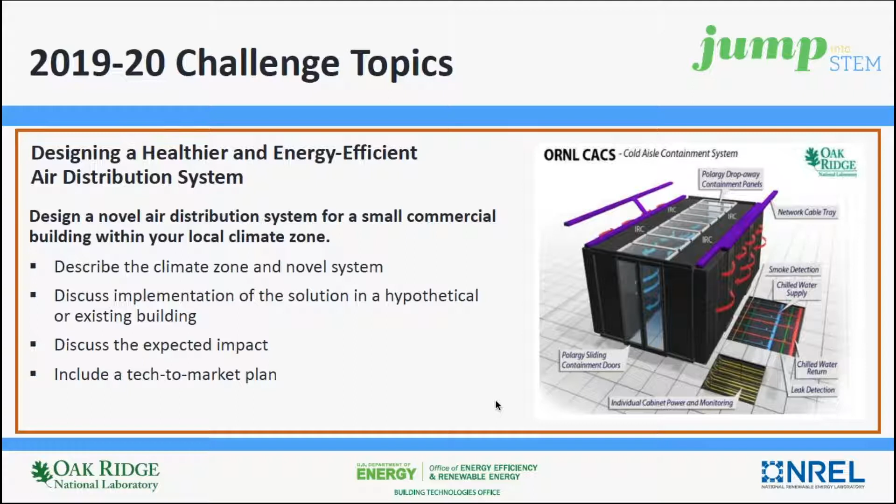The second Jump into STEM challenge topic is to design a healthier and energy-efficient air distribution system for the small commercial building setting using your local climate zone. Strong Ideas will identify a novel system for the selected climate zone and will present implementation of the solution in a hypothetical or existing building. Solutions should articulate the expected impacts from the design system and also include a tech-to-market plan.

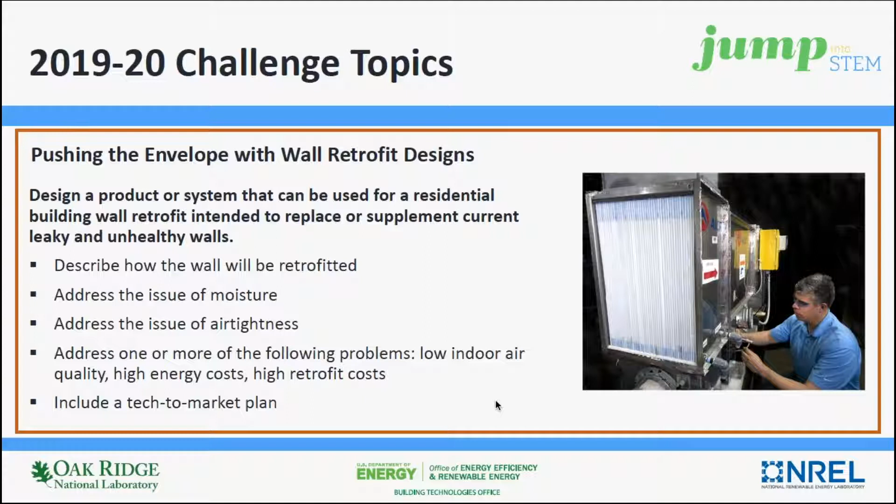Now, up next are the webinar series supporting the 2019 to 2020 Jump into STEM challenges.

Third in the series is a presentation on field experiences in implementing wall retrofit solutions, co-presented by Matt Waring from Viridiant along with Bill Riggs. Originally from Richmond, Virginia, Matt is the son of a single-family contractor and grew up around construction and on-job sites. He has worked as both a single-family and a multifamily superintendent. With 5+ years with Viridiant, Matt has worked as a technical advisor, project manager within Viridiant's multifamily team, and he is now serving as the technical director working with Viridiant's in-house field personnel and project management staff to provide rating and construction consultation services to a range of clients throughout Virginia.

Bill Riggs was born in Richmond, Virginia, and attended school at the University of Vermont in Burlington. While studying environmental sciences, Bill worked for a small independent contractor that performed energy audits and weatherization work. Upon coming back to Richmond, he worked for a single-family contractor that specialized in deep energy retrofits. Bill is currently serving as a technical advisor with Viridiant, providing verification of various green building programs as well as consultation services.

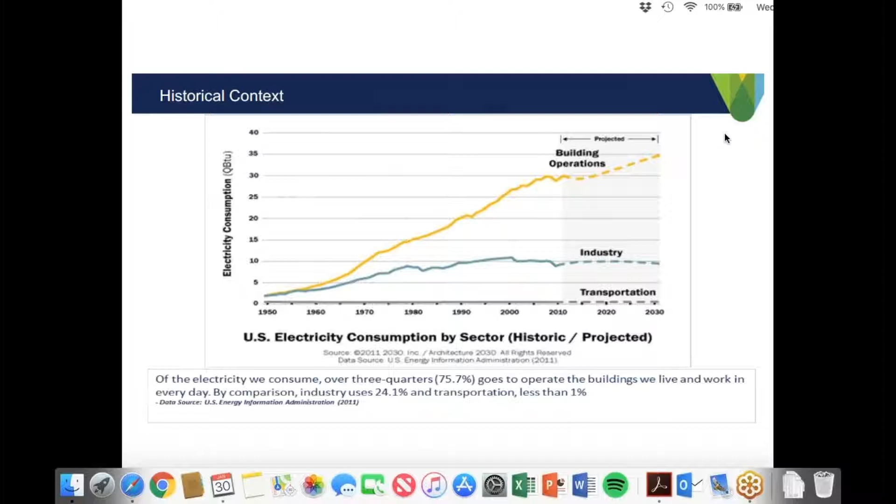You could get away with kind of murder with regard to overall buildings and what went into them. There were kit homes at that time, people building their own houses. So there are a lot of variables out there in construction type, but this really highlights the opportunity across the nation to improve upon existing buildings. Bill and I both agree that renovation is kind of the greenest form of construction, in that all of the resources are pretty much right there in front of you — it's not cultivating new resources to maintain or retrofit a single family home that's existing.

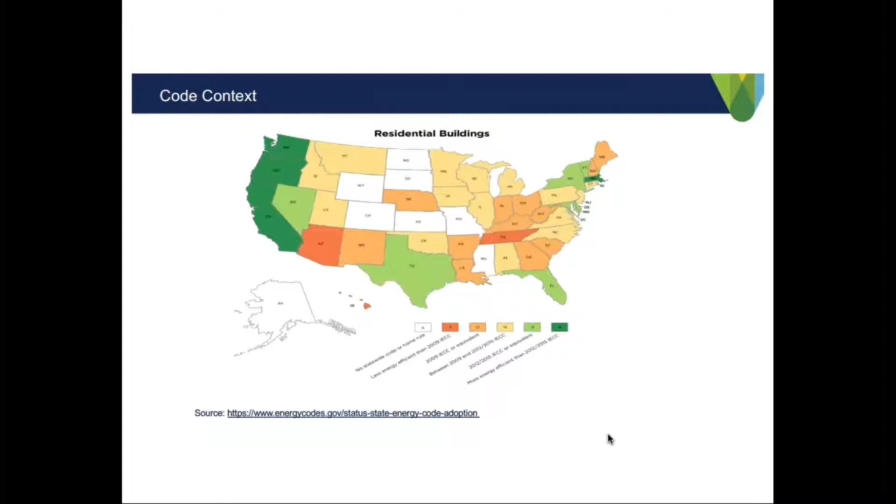For sure. Next slide, please.

One thing I'll add is that here in Virginia, if you're on the Eastern Shore, you're in one very distinct climate zone, and if you're in the tip of Virginia out west, you could almost be in climate zone 5. Really, some of these lines are a bit arbitrary. So the flexibility of being able to use a product or retrofit a home with a product across many different climate zones and building conditions is very important to us, even just within the state of Virginia. You're watching HGTV — we're not putting plastic in our walls here, but you might be doing that in Maine, putting a vapor barrier, a class 1 vapor retarder, in a wall system. These are all things that would have to be addressed in a retrofit scenario.

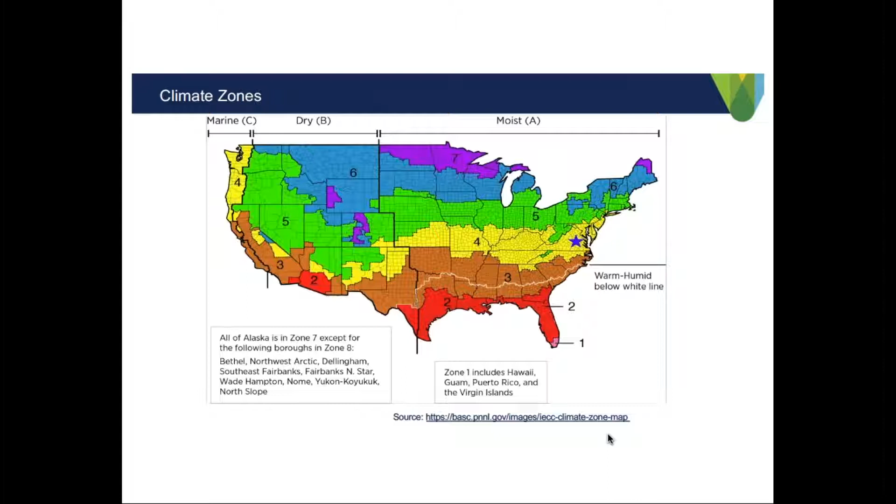That's all readily available — I think we have some links here. We'll include that and get them to Caroline so she can include those links too on the website moving forward. Next slide, please.

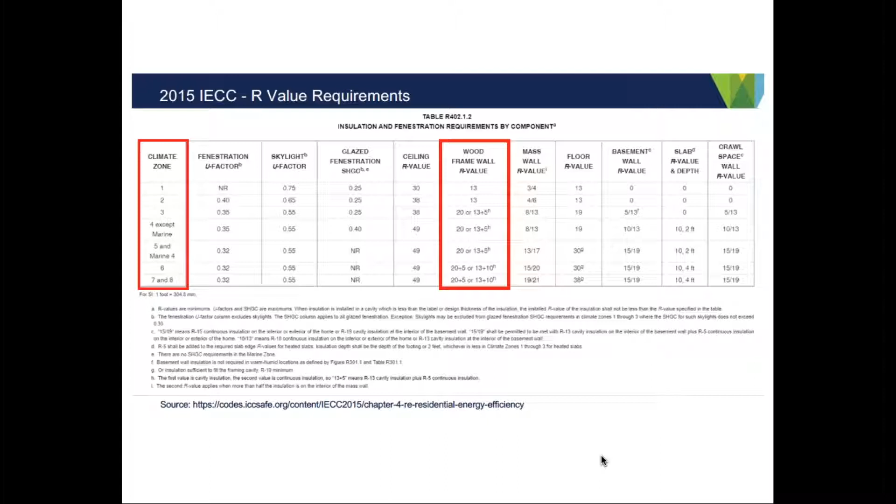Having talked about climate zone and taking that into account when you're addressing this issue, we wanted to talk to you about the history, the climate zone, and then what we do when we look at a home or a set of drawings and move this problem out of the theoretical and into the field, into the real world.

While you're thinking about the design of a wall and what it should do, essentially a good wall is an environmental separator. We build buildings to get inside from negative 60-degree temperatures like we're experiencing out west right now, so we don't have a lot to complain about. I think it's 40 here today, but it would be a lot more difficult to provide this webinar to you all if we were sitting outside. So the entire intent here is to separate our internal lived-in environment from the external environment.

A good wall should have an air control layer, a moisture control layer, and a thermal control layer. We want to prevent draftiness, wind from blowing directly into the building. We want to prevent rain and bulk water from entering the building. And then we have to have some sort of thermal control, which is the insulation portion of this equation. These are really the three main things that a wall must do in order for it to function properly.

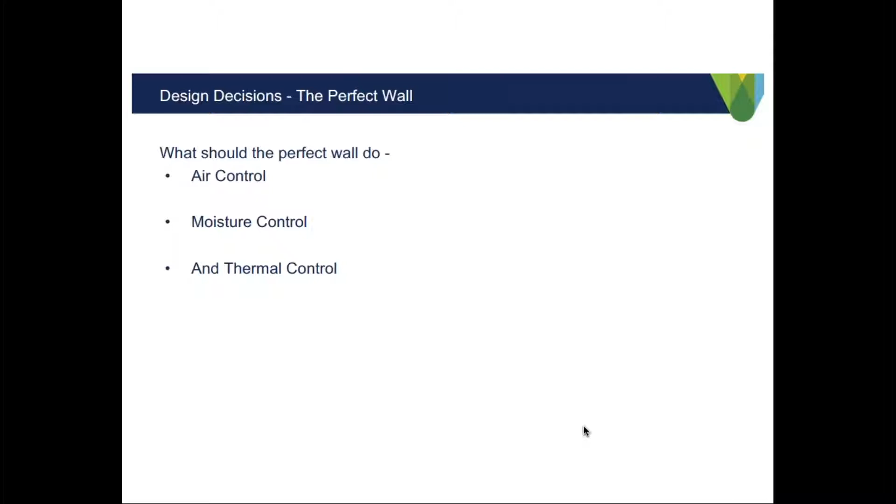Traditional energy retrofits typically focus on a crawl or a basement and then an attic, and that is because these places are accessible. That is a big reason. It's easy to get into an attic and say, hey, I could add some insulation here, whether that's to the roof deck or even to just the ceiling plane. But the same can be said about a crawl and a basement. Now, buildings' roots are really that crawl or basement, and due to stack effect, much of the air in a building does flow upward and out of the roof assembly or through that ceiling plane.

So both of these are very effective retrofit strategies. But if you look at that simple drawing of a house in terms of a beer cooler, the top and bottom of a beer cooler doesn't do anything in and of itself to keep your beer cold or your sodas cold.

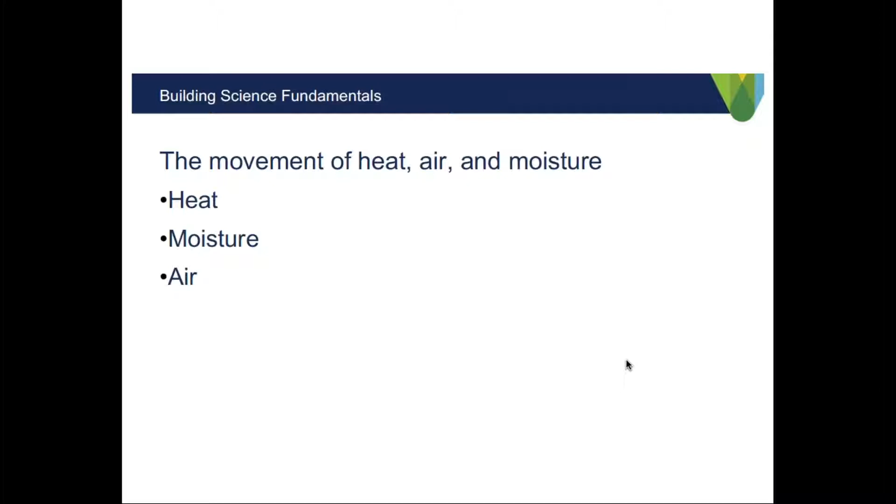The movement of heat in a building is very important, right? We want to keep the interior temperature to about 70 degrees. Caroline, if you don't mind hitting that next slide.

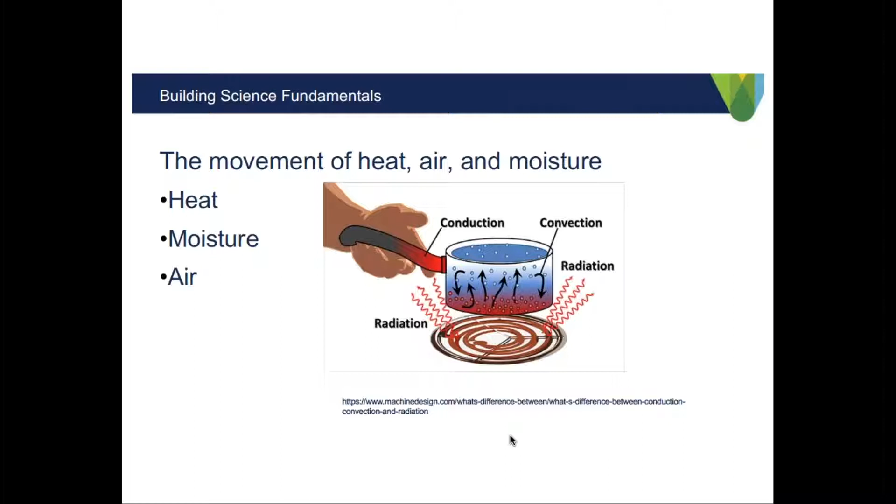The same forces for heat movement work in a building as they do in anything else. Conduction is heat moving through a solid material. Convective loops are present in all homes, and we'll talk a little bit about that in wall systems. And then radiant heat—the best example of radiant heat is just the sun warming the earth. So these are all things that are happening in the built environment that we need to control. We're either taking heat out of the interior space or putting it back into it in the winter like we're doing now. Next slide, please.

Air infiltration - air is a moisture transport system, and that's something we're going to talk pretty heavily about as we keep pushing through here.

All of these three components need a driving force - one very wet area, and that wet area wants to move to more dry areas. That's just how water works, and the same thing with heat. All these fundamentals are important to take into account when thinking about overall design decisions with regard to wall retrofits, and how the system works as a whole to keep these components in or out.

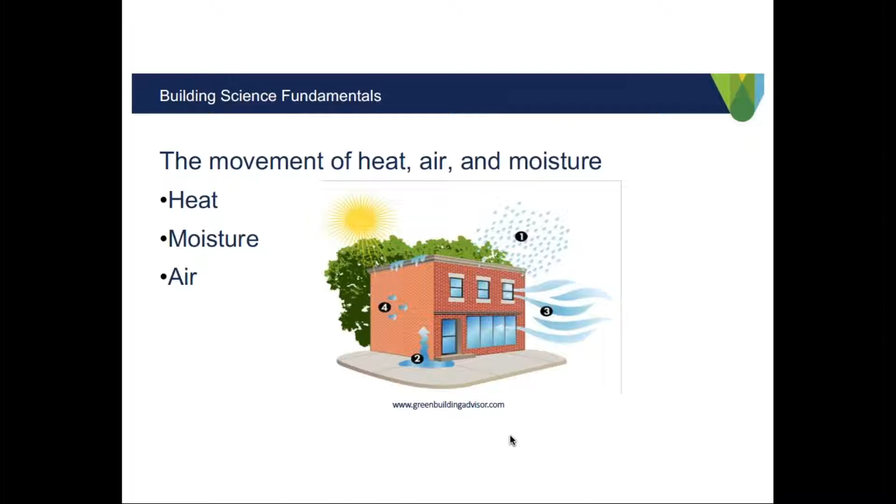Mold, mildew, organic growth - these things are very important to the health and safety of occupants. People in buildings is what we should be designing around first and foremost. But we build buildings out of mold food, organic materials. Every day somebody comes up with a new material that we input into buildings for the same purposes, but the majority of our buildings are made out of wood and paper, and these things are mold food. So as you start to increase the moisture content in a small enclosed space, you will get organic growth, and that growth will just feed on the actual material you built your building out of.

These are the things we try to avoid every single day so we don't run into these type of issues. It really is a big issue in a hot, humid environment like we find ourselves in here down towards the eastern part of Virginia and much of the country - this can be a gigantic problem. If you're in Arizona, this may not be as big an issue. But these are the biggest building failure issues we see, so we're coming at this from our experience. Next slide, please.

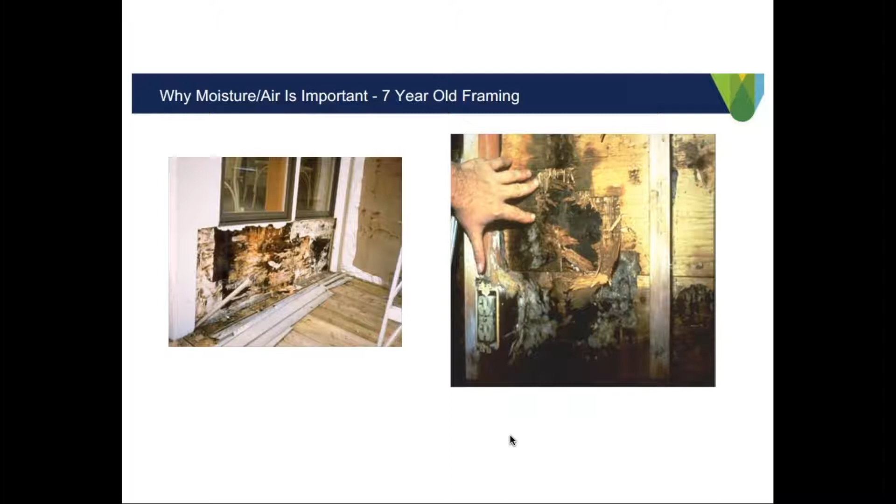So thermal control - for optimal thermal performance, what are we looking for? What's the goal here? Insulation should fill the cavity completely, like your hand fills a glove. Every cavity is a 6-sided box as well - you want insulation to fill the cavity front to back, top to bottom, left to right. That's what we grade insulation on - 1, 2, and 3 levels, with a 3 being a pretty poor insulation install.

A grade 1 insulation is free from voids and compression, and should encase any infrastructure. You shouldn't have wires or plumbing compressing the insulation as it's installed. This creates convective loops in the wall system, which degrades the overall R-value of the insulation.

When I say that, I mean if it's cold on the outside of the building, the air is more dense as it touches that exterior surface. It falls to the bottom of the cavity. As that air works towards the inside, it actually warms back up and creates a loop, and that air rises. So all the time, air is rising and falling in a wall cavity, which degrades the overall R-value of that insulation - you may be paying for an R19 and you may be getting an R5.

So install quality is a huge issue, and something that is definitely more difficult in a retrofit scenario, in many retrofit scenarios. Ideally, an insulation product would have high thermal mass, great sound attenuation - you want it to be quiet in your house, you don't want to hear every siren and person walking by - and permeability in wall systems is a very big issue for us especially, which we just talked about.

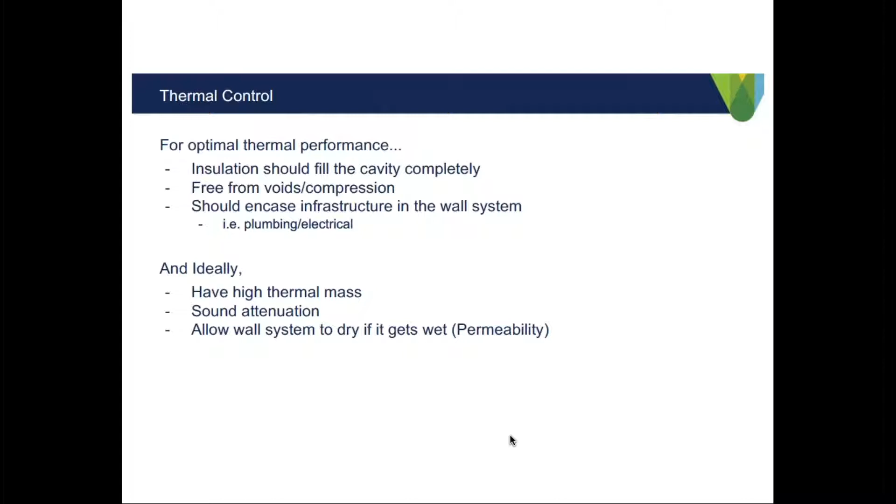Just a quick rundown on how insulation works and weighted R values. So we have a bunch of wood in the wall system, and that is R1 per inch. So every 3.5 inches, it's R3.5, and then in between that cavity you get R19. So overall there's a weighted average for the R value of the system, and that's an important thing to remember.

So small gaps and voids make it like you go and you have 5 tests and you get 4 100s and a 0, and somehow your average is an 80 in the class, even though you got a bunch of hundreds on tests. Well, it's the same thing. Insulation and the overall coverage of insulation works the exact same way.

R38 installed in a roof or an attic system with 5% gaps drops that overall R value to an R27. So again, your homeowner or client is paying for R38, and they end up with an R27. So a 30% reduction in what they're actually paying for. So just a quick rundown.

R is just resistance to heat flow. A U value is something that an assembly gets, multiple materials, and that is just the inverse of an R, so 1 divided by the R. These are just the 2 ways that a window system will get a U value, and an insulation product gets an R value. So just things to remember.

Yeah, so I think that's the majority of that stuff. So yeah, next slide please.

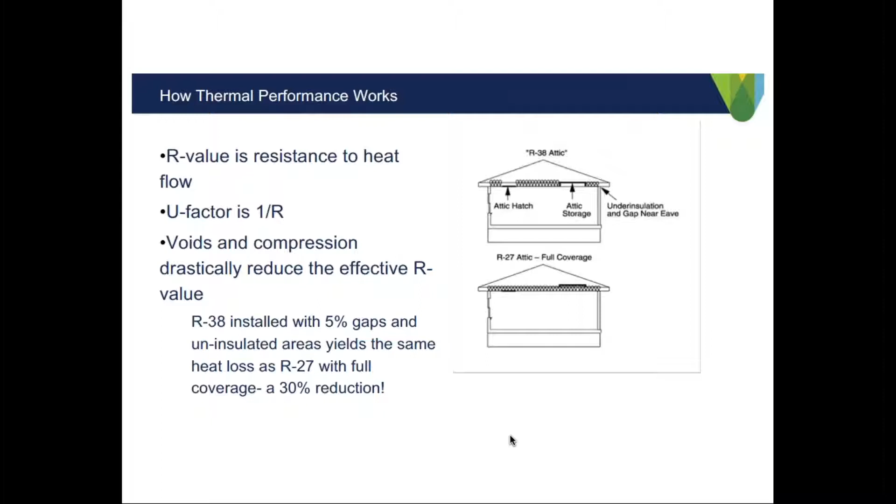I'm gonna let Bill take over here for a minute. I think the important thing to remember here is, one, the historical context is we're ripe for change here, and two, you will see what we have to do in the field, what it takes in the field to actually get some of this stuff done, and that's really where the rubber hits the road.

Right, cool. So you've got a bunch of different insulation types at your disposal here when retrofitting a wall. All of them have different characteristics and can be used in different applications. So foam comes in a couple different varieties. You've got spray foam, and you've got a rigid board that can be used. The rigid board comes in a bunch of different types—it can be XPS, EPS, and polyiso.

Those are all great for exterior applications, whereas spray foam is great for hard to reach areas, and comes in 2 different varieties, that's open cell and closed cell. So open cell foam, like it sounds, is more expansive and is often water based. It has a lower R value than its counterpart, closed cell foam. Closed cell foam is very dense, it's great for achieving air tightness and has high R values, but it has a very low perm rating. So that's something to consider.

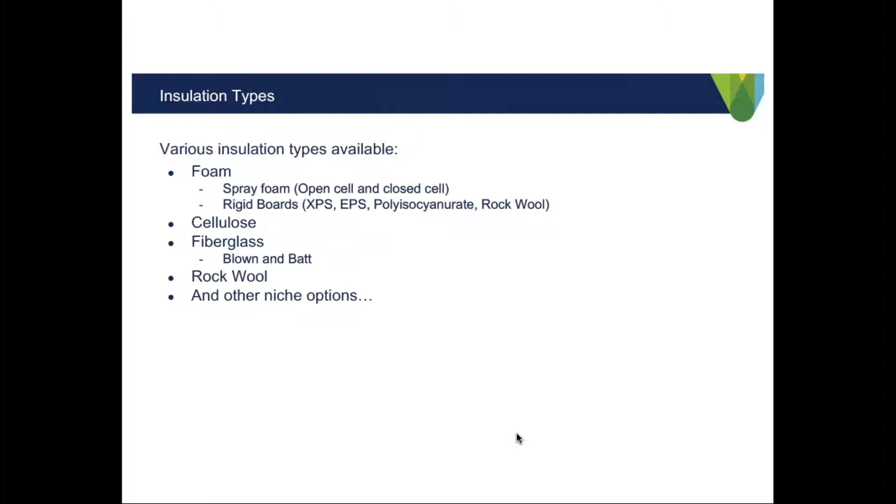One of the most important things is a site examination when determining your work scope. This is probably one of the most determining factors. Walking the exterior of the site can give you a great idea of what this project is really going to need. One of the first things to look at is cladding type—if it has siding versus brick, that can really change your scope for your retrofit.

You want to look at bulk water, so we're looking at site grade to make sure that you have positive flow away from the foundation. Any sort of negative slope around the foundation is going to really invite that water into the foundation. Looking at gutters and roof overhangs to make sure water is properly discharged. House orientation can play a big role, and similarly with surrounding vegetation.

If you're driving around and you see somebody's roof covered in moss, that's just because they're not getting enough sunlight and there's not enough drying potential on that roof. So all of these things can play a huge part.

For your challenge, a lot of this you don't necessarily have to take into account, but in the real world, these are all things that absolutely have to come into your decision tree when you're making decisions and trying to move forward with a good, healthy design for both the homeowner and the home itself.

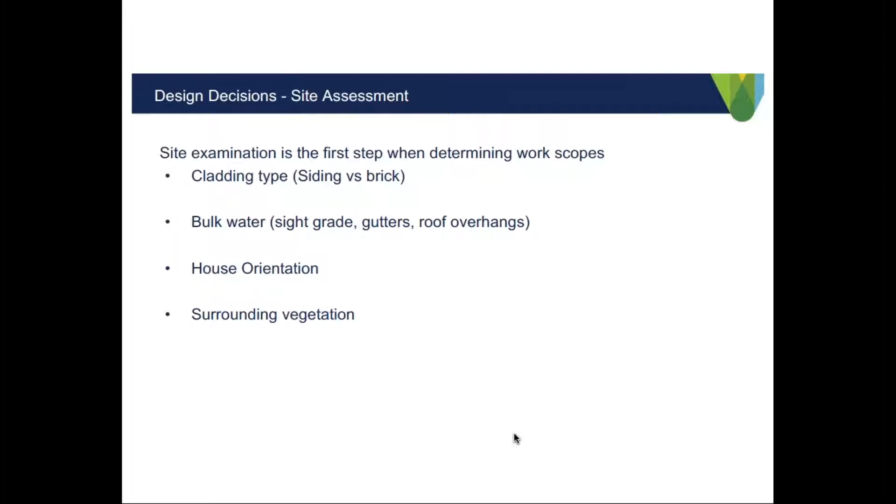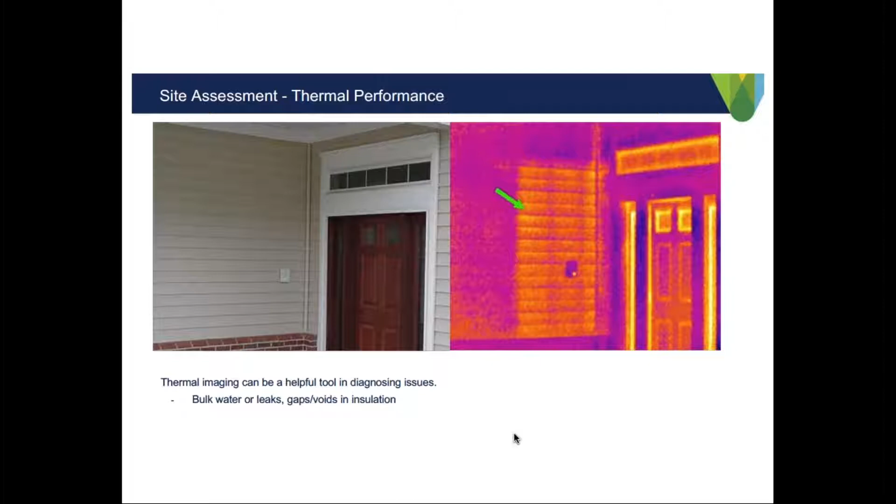You can also note the kind of thermal loss around the windows and fenestration in this picture. It always jumps out at me, how much loss you get around those window openings. So again, a weighted R value, weighted U value of the overall assembly is important, trying to improve the overall performance of the project.

Next slide. Along with the exterior site assessment, we have to take the client goals into account. Budget is often probably one of the largest concerns. We want to make sure everybody gets a good return on investment on the work that's done. But then comfort is a serious concern. If someone has large discrepancies in temperature between the first and second floor, that can often be remediated by air sealing and insulating the attic plane. So those are important things to take into account before you decide on a scope.

And then intrusiveness - if somebody works from home during the day but wants to improve the performance of their home, but they can't interrupt their work schedule, then that can play into the scope as well. And then lastly, indoor air quality can play on scope if you have anything to.

I would just say, goals of the renovation - I don't want to gloss over that too quickly. A lot of what we do is focused around budget, but homeowners have specific goals. They want to be able to use that bonus room in their house or that ancillary dwelling unit. They have specific goals, and it really helps to narrow the scope of what you're trying to do and hone in on what the actual problems are for the homeowner, because client satisfaction on the back end is important for everybody. This is real world stuff that we deal with day in and day out, and if the homeowner is unhappy currently, you can help them be happy. That's an important aspect of what we do.

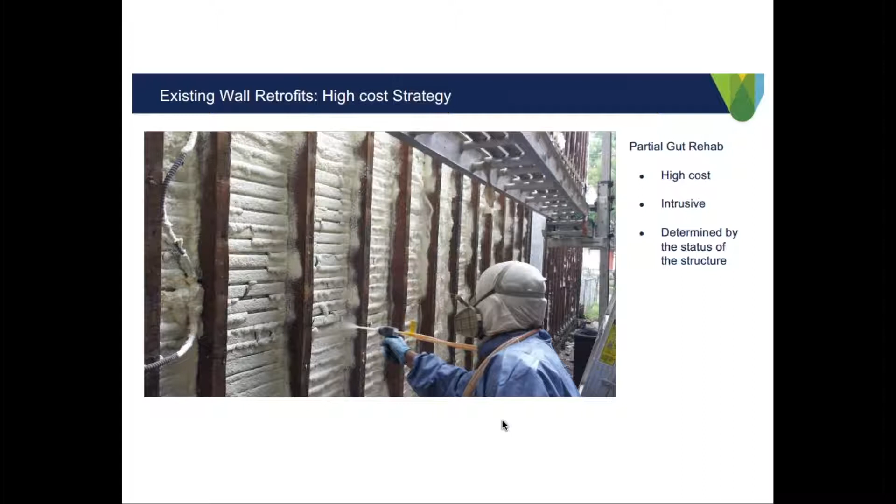What ended up being done is that the cladding and the sheathing along the exterior was completely removed. And what he's doing here is spraying closed cell foam into the wall right now. So that's giving you a nice air tightness from the closed cell foam, and that's actually going to be paired with some fiberglass insulation visible on the next slide.

So this section of the home was then re-sheathed with SIS sheathing, which is a structural insulated sheathing. This combines the insulation with the sheathing, reducing labor costs, and is often more used on new construction.

But from behind, we've got the closed cell foam in the wall, and unfaced fiberglass bats on top of that. It's kind of a tried and true method in the field, just called flash and bat. It's a great combination between the products because it relies on the air sealing of the spray foam,

which then improves the thermal performance of the fiberglass bats. Yeah, they added a layer of, in place of OSB, structurally insulated sheathing on the exterior to prevent thermal bridging. We saw some thermal bridging in that thermal camera image, and that's what we refer to when talking about the low R value of a framing member like a wood stud. So they reduced that, as well as included insulation into these cavities, which was not there prior.

And how did this thing end up on the back end, performance-wise? It was near zero, wasn't it? Yeah, we like to call it a near zero energy remodel. But it was tied with a new HVAC system and solar PV on the roof, which reduced the electric bills to about just an $8 service charge per month for the year. So obviously something that works very well, but this was a full-on, more or less, gut rehab.

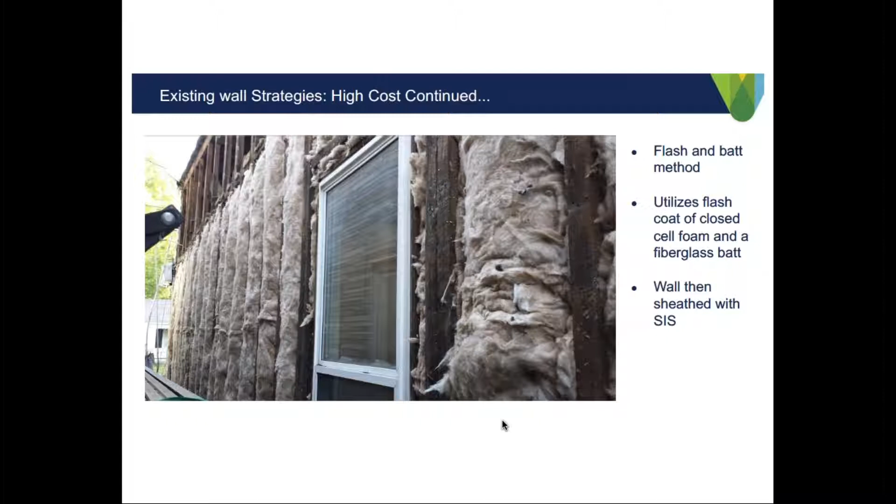And then just to hit on the point of new material meeting old material, and depth issues with regard to adding continuous exterior insulation. All of these materials need to be married up to one another from an architectural standpoint, and show as a contiguous exterior cladding system on the back end that is aesthetically pleasing. So you can't just bump out 3 inches of foam and not have some way to address that transition back to other cladding, if you're not doing this to all 6 sides of the building. So design decisions, it's all got to be taken into account. The whole thing works as a system.

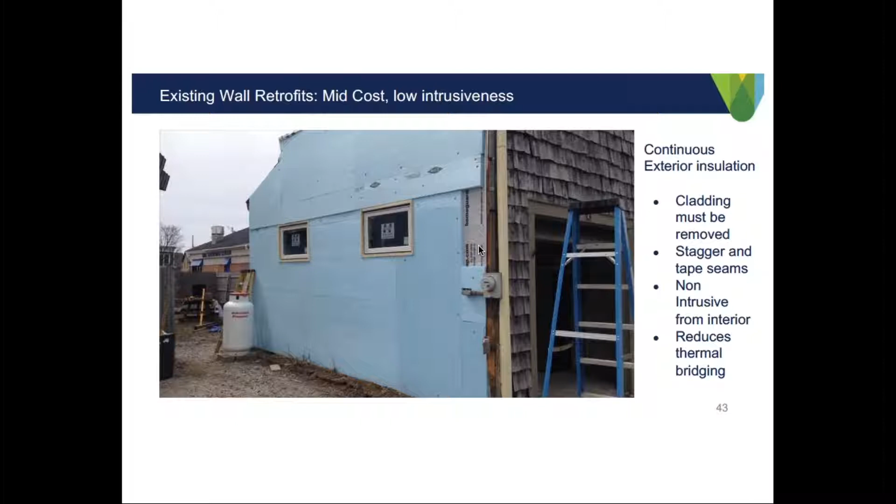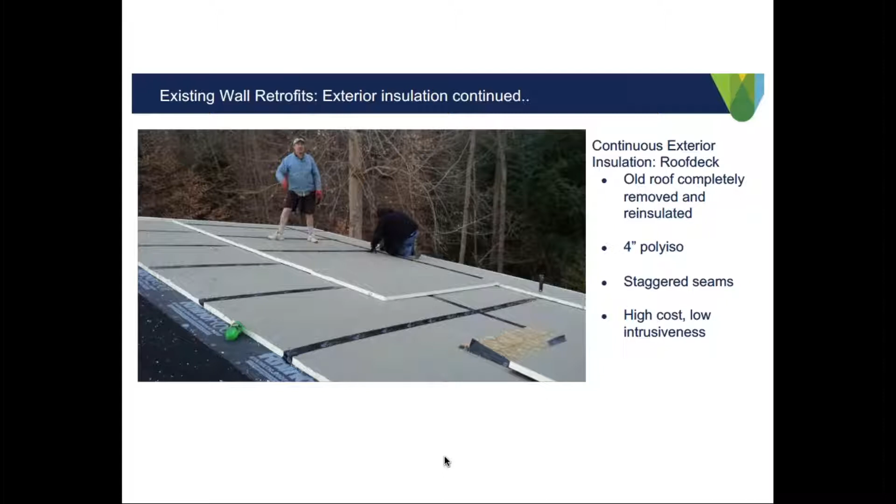Two layers. They have all of their underlayment already laid down there, and then the actual roofing goes back over top of that on the back end.

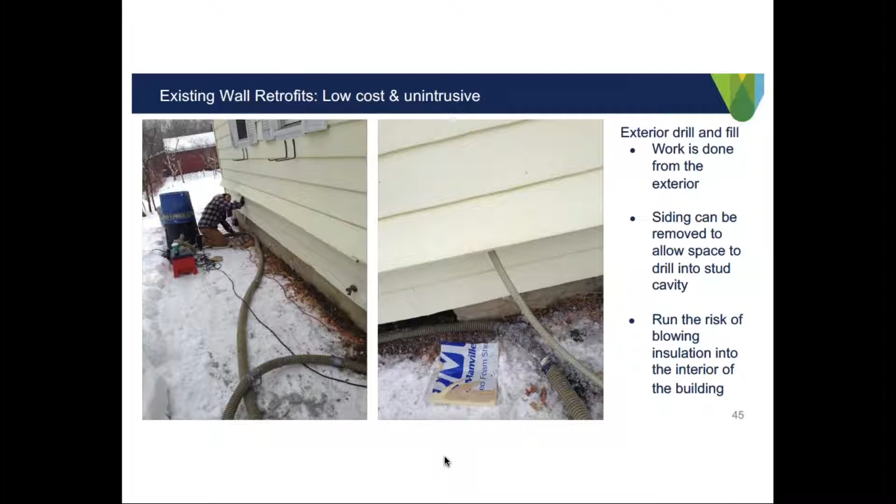For example, on this work scope, we ended up cutting a perimeter hole around the entire home along the exterior walls and removing existing fiberglass insulation. Fiberglass insulation does nothing to impede the movement of air, and it acts as a filter, so we were able to see where all that air movement was through the cladding and the fiberglass.

Of all these projects - this is probably one I'm most proud of - we did a blower door test before going in, and we were completely unable to depressurize the home. It was estimating about 12,000 CFM of leakage, which is extremely high. After the work scope, we brought the attic into conditioned space, conditioned the crawl space, and re-insulated every wall cavity with cellulose insulation. By doing so, we were able to drop the number to 4,000. Quite a big jump there.